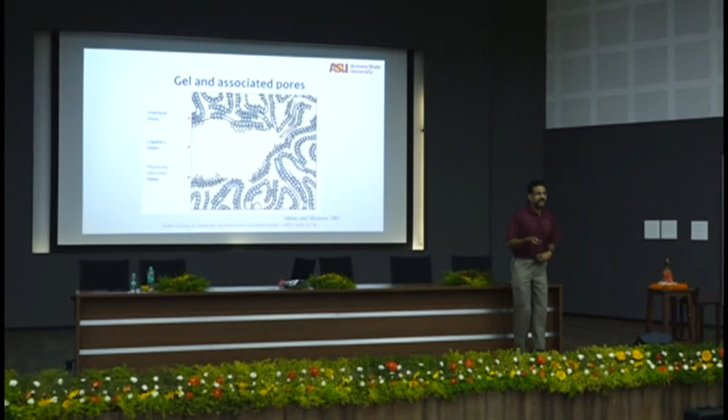Therefore, you will see silica fume. Have you heard of shrinkage in silica fume? Everybody will say that except the silica fume guys, right? Of course, they'll say yes, it shrinks but it won't crack. They're very smart. It shrinks, which is kind of true, because I've given you with silica fume a higher strength for your material. Therefore, even if you have shrinkage, it won't crack.

And it's very hard to refute the fact that a high surface area material like silica fume does shrink. When you have a large surface area, you have large area for water to evaporate. Therefore, it should shrink. It will shrink. But if it shrinks, they'll say, oh, it doesn't crack much because our strength is better. Might be true sometimes. And again, you can't make generalized statements.

That's why when some of you ask me, what will happen, sir? I said, I don't know. You can't make generalized statements. Classic example again: father behavior, I know. Mother behavior, I know. Can I predict the son's behavior? Same thing. I know one concrete in one place, another concrete in another place, same concrete some other place. I have absolutely no way to predict. There are so many variables that go along.

So try to understand and then try to come up with your own rational arguments.

And then there is physically adsorbed water, which will go when the relative humidity goes further down. Gel water, we really don't want to speak of gel water leaving, because CSH, that gel water is the H in CSH. If that H goes, it will become CS. You don't want to talk about a calcium silicate scenario. You want the calcium silicate hydrate. If it's calcium silicate, it's just a mushy powder, it will just go away. You want that hydrate H to be there.

So some people will talk about removing gel water. I'm not a big fan of talking about removing gel water, because if you remove gel water, you don't even have the thing in the primary place. So yeah, you can remove capillary water, you can remove adsorbed water, you can rearrange gel water. Gel water changes, like I said, because this capillary water is gone, you have internal rearrangement. So gel water rearrangement happens, gel water doesn't go away, should not go away.

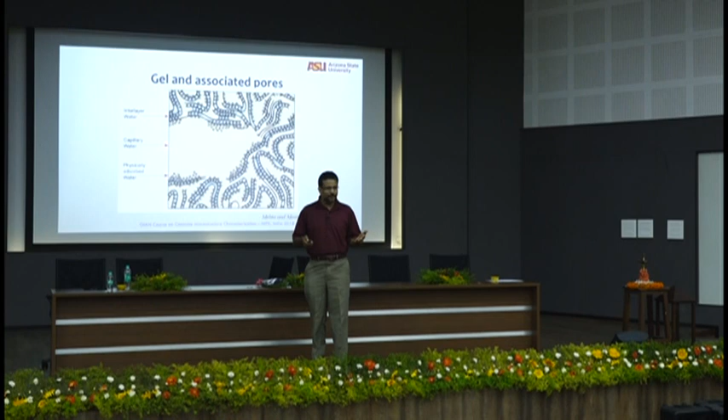And even concrete textbooks, you will see gel pores are dry, drying of gel pores. I mean, gel pores should not be dried. Interlayer water has to be there. If your argument is that gel pore - I'm just calling it a gel pore because I'm calling the smallest pore gel pore, I'm okay with it - but if you're calling gel pore as the interlayer water, that's not correct. Get it?

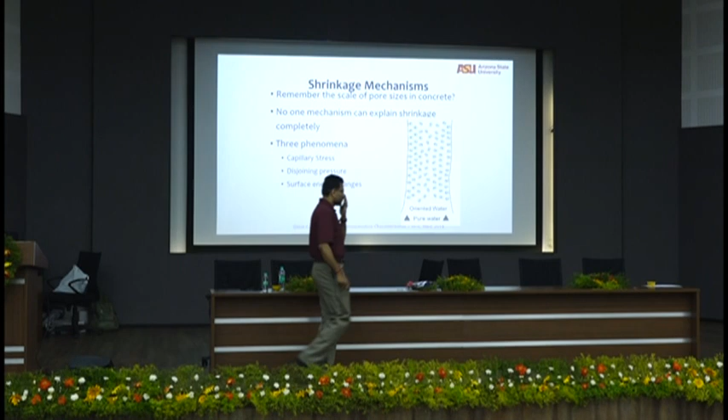If you look at the scale of pore sizes, remember that scale. If the gel pore is my size, the capillary pore is the size of Mars. So you have all these size scales it has to transcend. Therefore it's natural that not one mechanism can explain everything. A lot of people have tried a unified mechanism of shrinkage. Nonsense, you can't explain it - it's like string theory for the universe. There is no one mechanism that explains everything.

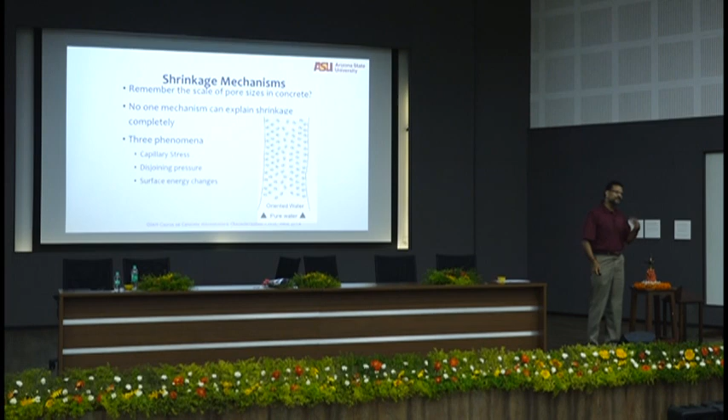So we do it typically by 3 phenomena, and the reason I do only these 3 is they are very easy for you to remember what happens, and therefore when you see shrinkage cracking, you can relate to it quickly. The first is the capillary stress mechanism. Second is disjoining pressure. Third is surface energy changes. I'll explain each very simply.

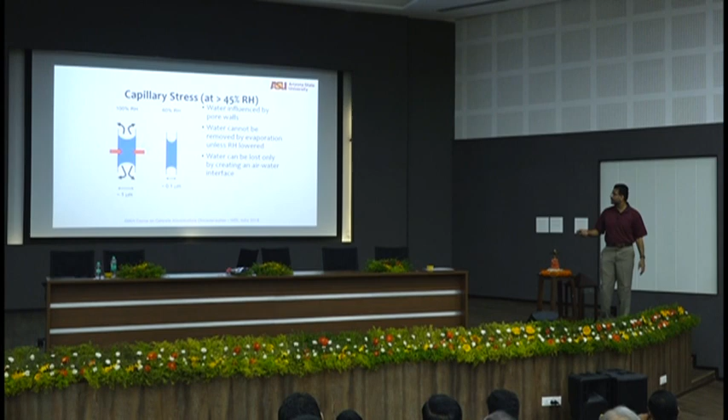Capillary stress mechanism happens only at higher RH. Which means, remember, water from capillary pores will go away. Remember stage 2 ends at about 45% RH in that picture? Capillary water will go only until about 45% RH, so you really don't worry about anything else until then. Capillary stress - water is influenced by pore walls.

Very simple - you see this meniscus? When water goes away, the pore walls try to shrink. This is a larger pore, this is a smaller pore. Larger pore at 100% RH dries off first. If the RH starts to go down, smaller and smaller pores dry off. So water can be lost only by creating an air-water interface.

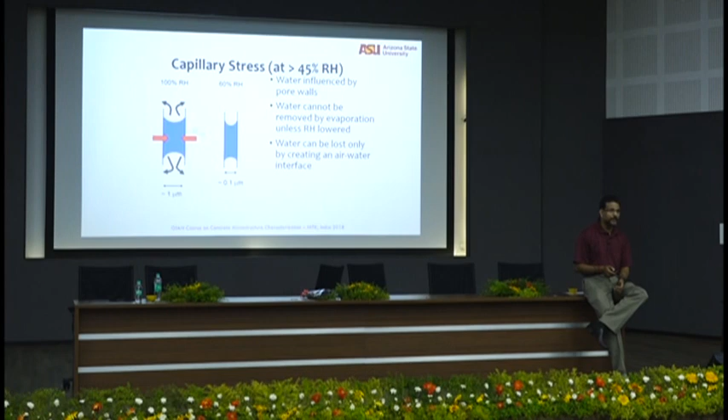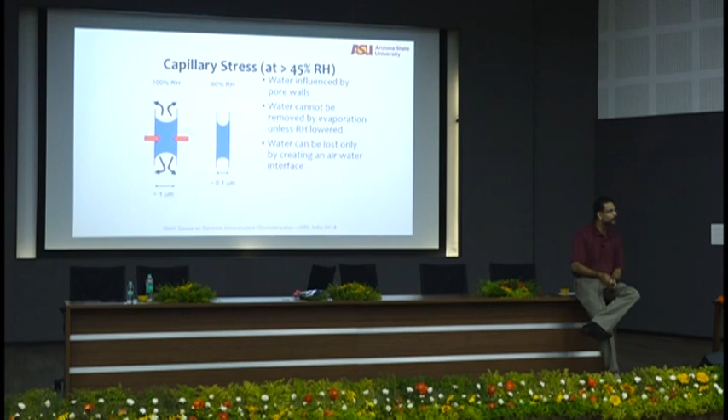Water cannot be removed by evaporation unless RH is lowered. I gave you the example of clothes drying - water cannot be evaporated unless RH is lowered, which means when it's raining very heavily, relative humidity is very high, you cannot put a cloth right next to the rain and heat it up - it's not going to dry. What you need is not heat, what you need is removal of RH. If the heat removes RH, fair enough. So whatever mechanism drops the RH is what you want.

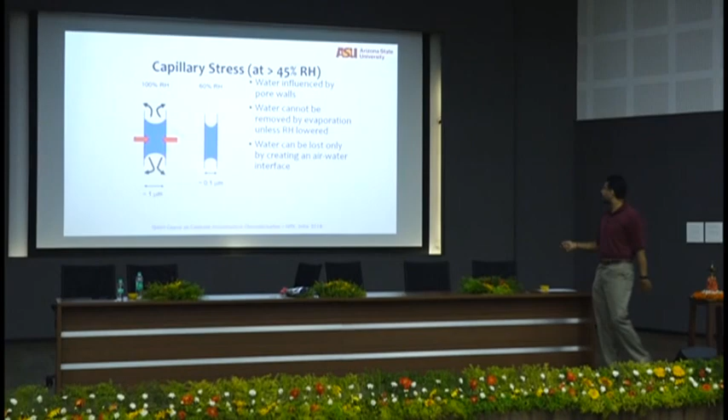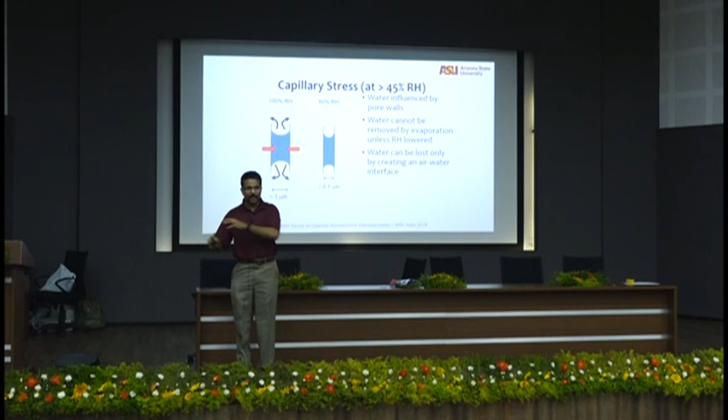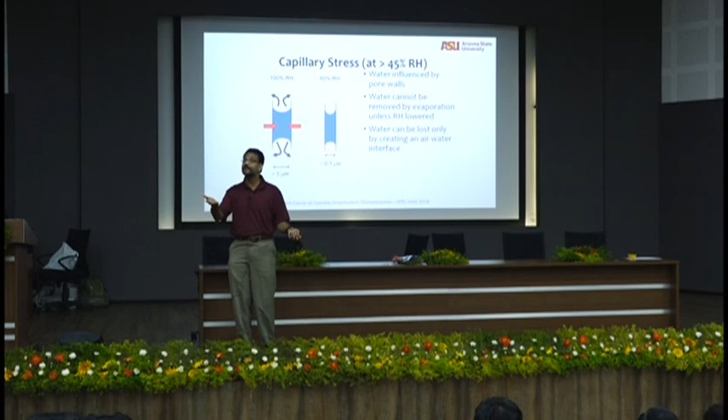Very similar idea here - water can be lost only by creating an air-water interface. So if you talk about drying of anything, the first principle in drying is creating an interface between air and water. Water everywhere, 100% RH - you take one water molecule away, create a water-air interface for that air to drop the RH of the whole system, then you take another water molecule away. Heat does that typically - gradually takes water molecules away, gradually evaporates them, creating space for air, first as water vapor and then as air molecules.

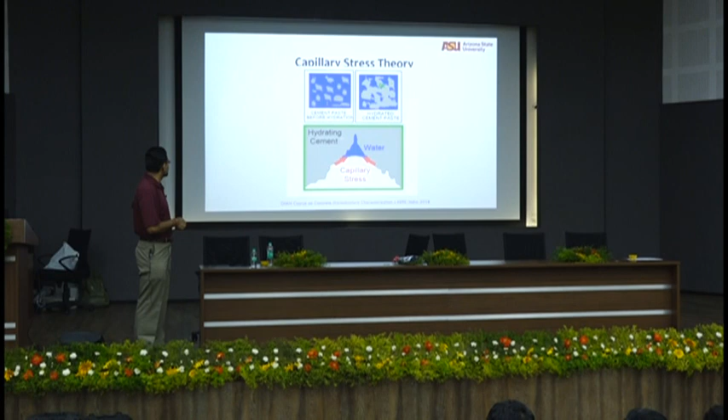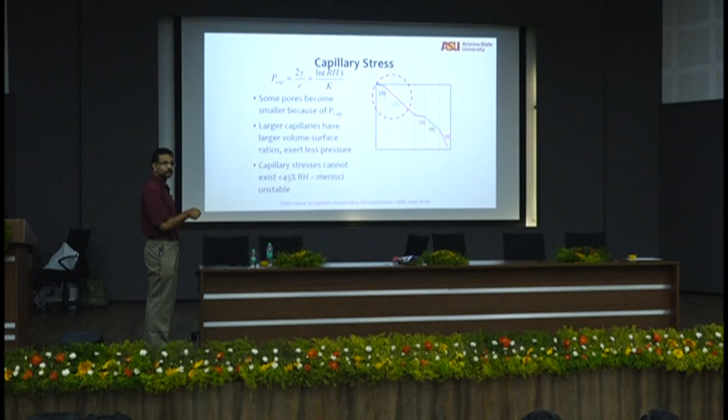That's the capillary stress theory. Basically you have hydrating cement, water in the pores, capillary stress, you dry the water off, and then the simple equation: capillary pressure or capillary stress is 2 times surface tension over the radius. Pressure is inversely proportional to the radius. It can also be given as the natural logarithm of the relative humidity divided by a constant K. I've told you where this happens in that curve - in stage 1 and 2. Capillary stress happens very early on.

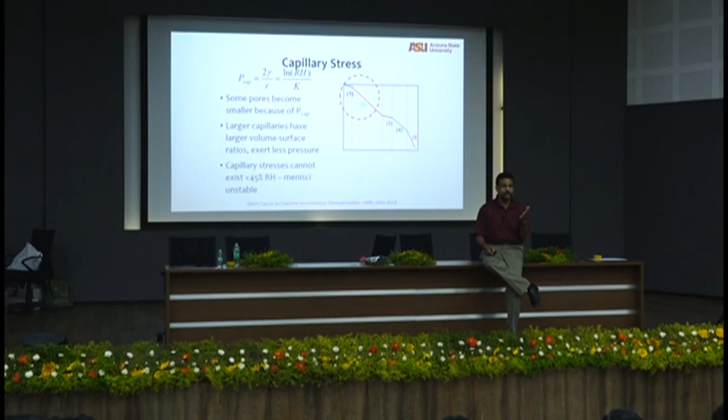This shrinkage is popular in most parts of India where there is reasonable rain. Forget Rajasthan, forget very dry areas, because you will never drop really lower than 45% RH there, because you have seasonal rains replenishing water in your concrete all the time. So this capillary stress mechanism is what happens if you have drying shrinkage.

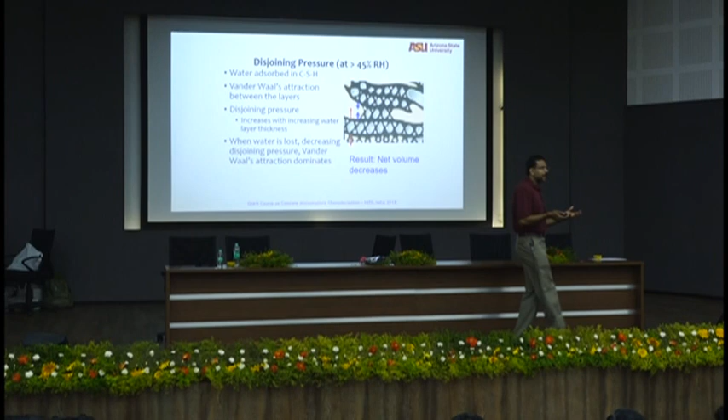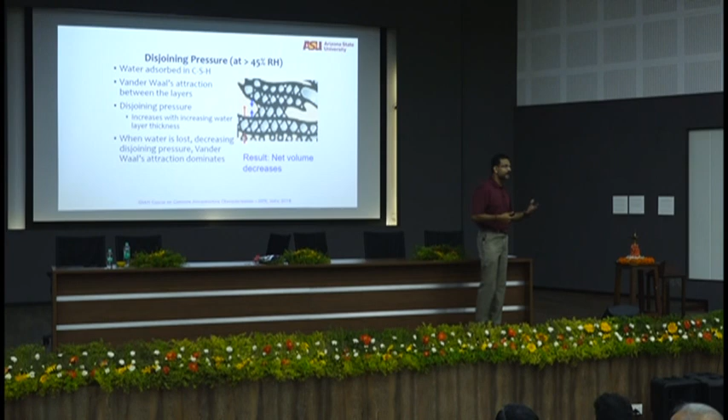The next one, disjoining pressure, also happens at greater than 45% RH, but disjoining pressure is a readjustment. I told you that because of capillaries, water going out of capillaries causes some local readjustment. Water goes out of capillaries at what RH? Greater than 45. But when that happens, at that same RH, there is some internal readjustment. That readjustment is the disjoining pressure, because the adsorbed water, due to van der Waals attraction between the layers, you start to lose the adsorbed water, resulting in a net volume decrease. So van der Waals attraction dominates between those two layers because the adsorbed water is gone, readjusting because the environment around that gel is now drier.

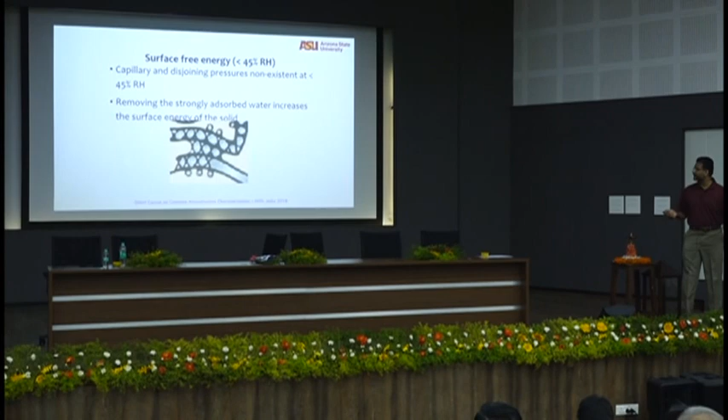So that's disjoining pressure - again everything happening in the microstructure. Surface energy happens at less than 45% RH. This is the only mechanism that happens below 45% RH. It's a very difficult mechanism to explain theoretically, but I'll cover the practical aspects here.

Capillary and disjoining pressure at lower RH is not even existent, because capillary pores have no water. Disjoining pressures are also not there because the equilibrium has been attained.

Then you have to remove the strongly adsorbed water. Now, if I have a layer of something and I attach something on that layer very strongly, the surface energy of that layer is very high.

Think about a piece of cloth and I'm attaching small beads in that cloth. To remove that, because of the surface area, removing the bead is going to be very hard if there is a kind of natural attraction between the cloth and the bead. It's going to be very hard to remove that.

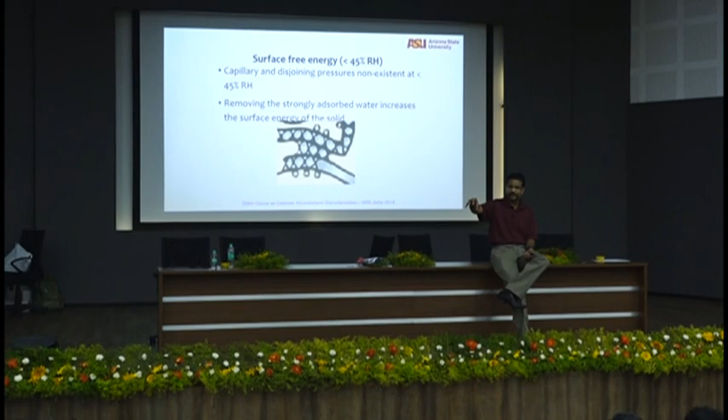So removing the strongly adsorbed water increases the surface energy of the solid. When I remove a layer of water, you remember BET theory, nitrogen forming layers on the surface, right? So when you start to remove that, you have to overcome the surface energy of the solid. So you will have a lot of pressure created.

And that happens at low RH, and that is what happens. You really don't, unless it's very, very dry. So where I am in Phoenix, we have a lot of surface energy effects, but most places with reasonable amount of moisture saturation, capillary and disjoining pressure is enough to talk about shrinkage.

Now, the consequence is that you will have cracking, very fine microcracks. You will have extremely fine microcracks because this is happening at real small pores. So the concrete will be extremely microcracked because of heat. It won't be visible, no, these are at a very small level.

But it has a tendency, it will have the capacity under load, under constant fatigue, all these cracks will grow. Shrinkage cracks by themselves are not dangerous, unless it's a very large shrinkage crack that happened on the surface. Not very dangerous. None of the shrinkage cracks are consequential in terms of load carrying capacity. There has never been a case where just because of shrinkage the concrete failed.

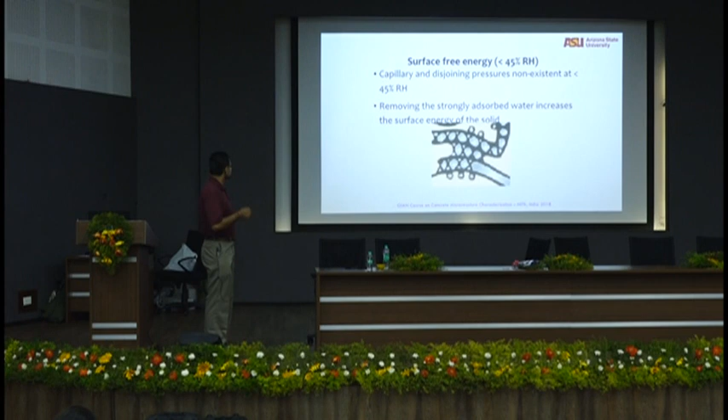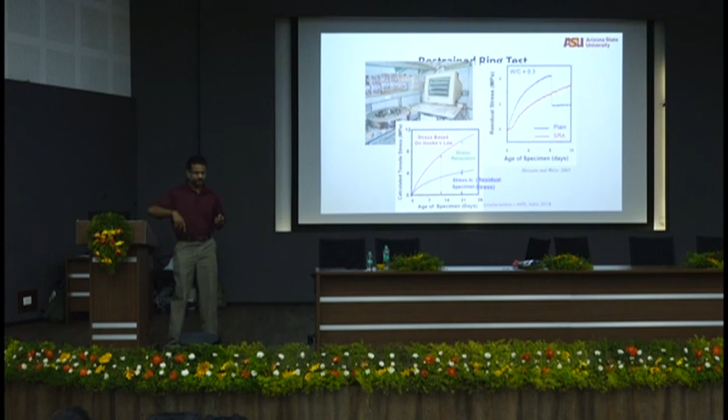So the simplistic idea is you have a calculated tensile stress, specimen stress, stress based on Hooke's law, stress relaxation. All these, if you're doing a restraint ring test, ASTM standard tells you how to do all of those.

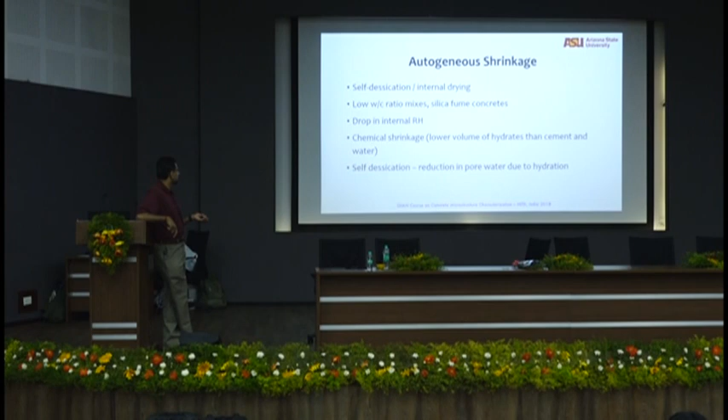Autogenous shrinkage, self-desiccation, internal drying, low water cement ratio, we talked about that, drop in internal RH. Chemical shrinkage, lower volume of hydrates than cement and water. Self-desiccation is reduction of pore water due to hydration.

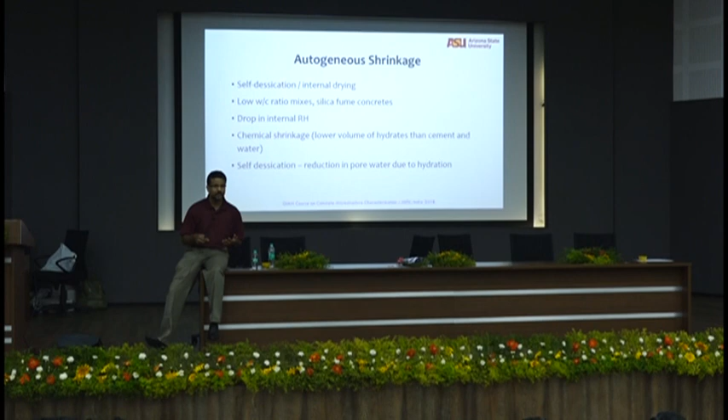So all of these, sometimes I feel this is overkilling using words. There are so many words: self-desiccation, autogenous shrinkage, chemical shrinkage, internal drying. A lot of times you use all of these different words and people get confused. It's broadly similar to what you guys heard yesterday when he was talking about different journals and stuff, right? H index, I index, SCI expanded.

At the end of the day, none of this matters. You have to do your work, you have to publish in a good journal. But sometimes you do overkill with these words, and that is one of the downsides of research. I should say the downside also. I said a lot of positives, right? Because a lot of us, I want to be general, I don't want to include anybody in specific, a lot of us do research for the sake of doing research.

I want a PhD, therefore I do. What's the use of it? Why do I care? I get my degree, right? So when you do that, that's a result. I want to develop something new. That complicated everybody else. The world was a wonderful place without you.

Suddenly you came in, published a paper, and people started paying attention to this. Some people really start with low water cement ratio.

Autogenous shrinkage, chemical shrinkage - every concrete, every reaction, every damn thing that you react one with the other has a chemical shrinkage. Does it influence things? Depends. Be careful with these terms, don't use them for the sake of using them if you don't need it. For example, if you're doing volume changes in concrete from the perspective of cracking in a concrete bridge deck or pavement, forget autogenous shrinkage, forget chemical shrinkage. You'll be better off with drying shrinkage by itself.

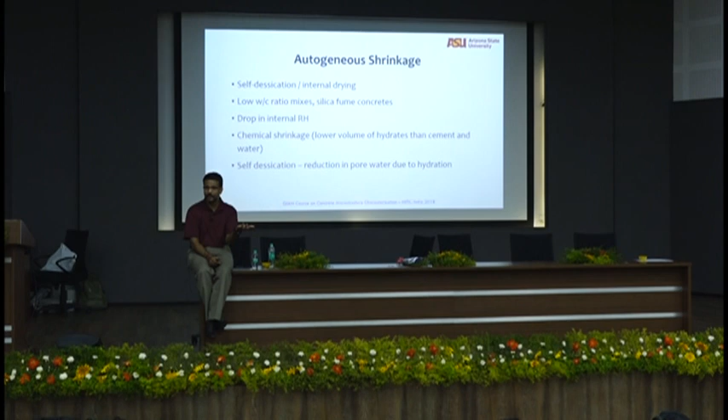We still struggle to understand the real mechanisms and ramifications of shrinkage and creep. Eventually we know it results in cracking, because if volume changes and it doesn't crack, nobody has a problem. It's only because cracking happens that we are concerned about it.

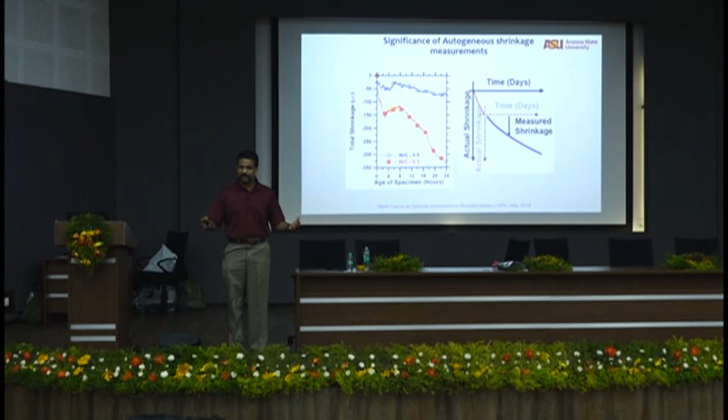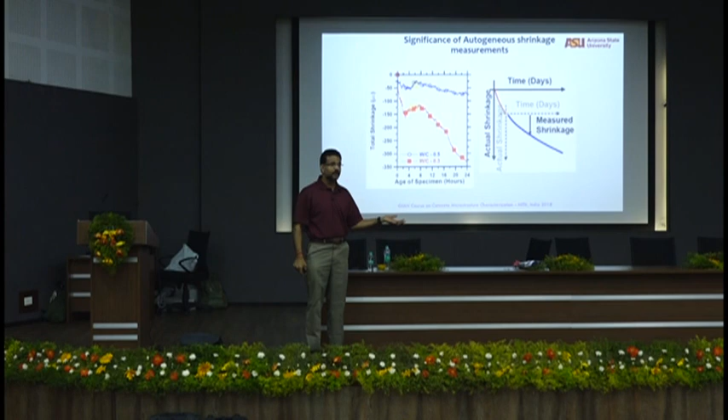Here is how you do autogenous shrinkage. The other advantage with your ring test is the residual stress that you measure includes autogenous, chemical, everything, because you start measuring as soon as you pour your concrete. But if you're doing restrained shrinkage or free shrinkage bar testing, when do you start measuring it? After 24 hours, which means you completely lose that part of the shrinkage, and you're basing everything on that measured shrinkage, and people put in these random numbers.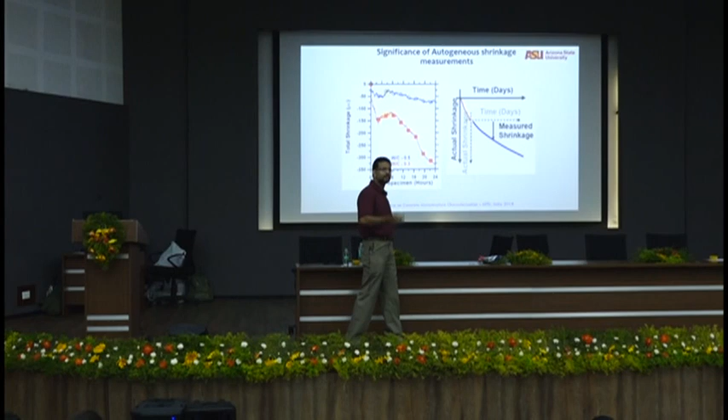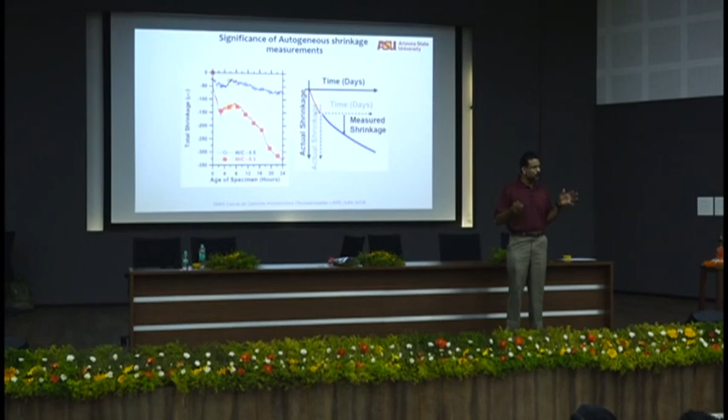600 microstrains and the concrete will crack - have you heard of that? You see it written in specifications: 600 microstrains and the concrete will crack. How do you know? 600 microstrains under what condition? Sometimes we overkill - somebody states a number from a study in the US or Europe, and immediately you put it in the specifications. That 600 microstrains is highly dependent on the relative humidity. You don't have the same weather conditions as in another place, so a lot of those things will change.

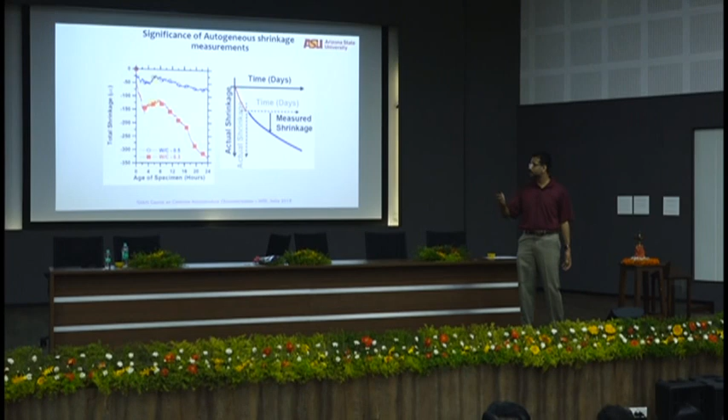Shrinkage reducing admixtures can reduce shrinkage. A lot of companies are making shrinkage reducing admixtures, but if you can buy alcohol cheap, that's the best shrinkage reducing agent. Basically, the best shrinkage reducing admixture is vodka. Why? Russians drink purer alcohol - vodka's alcohol content is much higher compared to Scottish and Irish drinks. Of course those are very expensive, you don't need that. So basically it's just alcohol, higher alcohol content.

What it does is a very simple thing. Do you know the surface tension of water? PhD students should know this number. I still remember the old British units: 72 dynes per centimeter. You can convert it to newtons per meter, whichever way you have. That is the surface tension of water.

Remember the capillary pressure equation I showed you earlier - does anybody remember it without looking? P equals 2 gamma over R. What is gamma? Surface tension. So to reduce the pressure, I have two options: increase the radius or decrease the surface tension. Increasing the radius means putting in large pores in concrete - do you want that? No. Small pores in concrete I like, but small pores will give higher stresses when water evaporates. So my option is to reduce the surface tension of water.

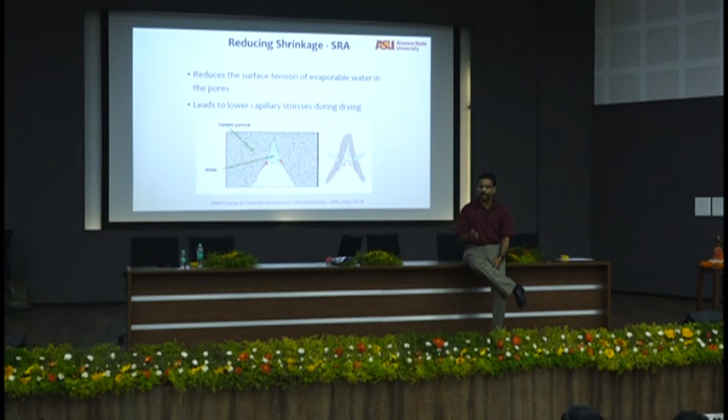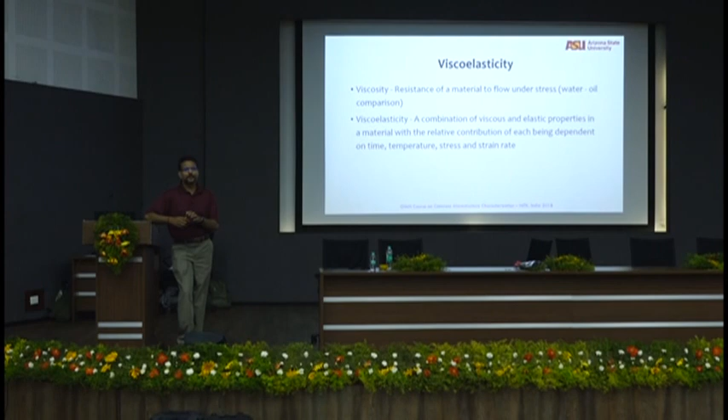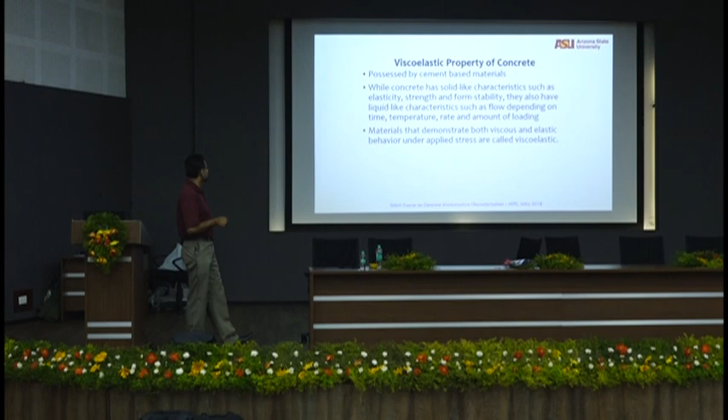Okay, I think we'll have time to finish creep and viscoelasticity also today. Quickly, we talked about viscosity being the resistance to flow under stress. I'm doing only those properties relevant to microstructure. So you have a combination of viscous and elastic properties. All of you know what creep is, right? Creep and relaxation. Concrete has solid-like characteristics like elasticity, strength, stability. They also have liquid-like characteristics like flow. Rheology, we talked about that. So materials that demonstrate both viscous and elastic nature are called viscoelastic.

Creep is the increase in strain under constant stress. Relaxation is drop in stress under constant strain. Okay, so we need both of these.

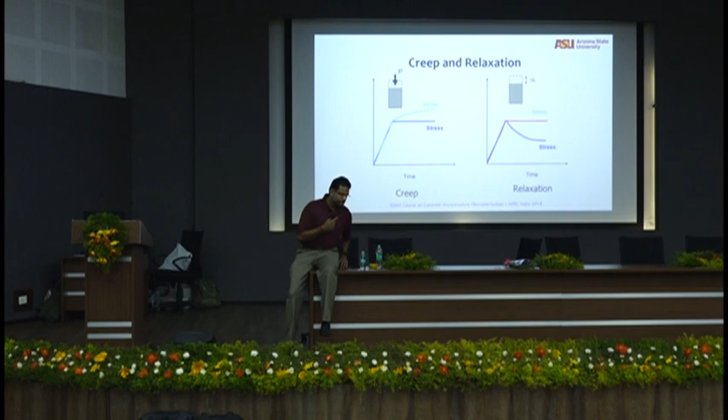So let me ask you a question. If you are building a high-rise building with concrete, columns with concrete, there is a natural tendency to go to high-strength concrete, right? If you're doing a very high-rise structure, very high-strength column. What is the reason they give for very high-strength concrete for a column? You can reduce the member size, right? So high strength, you can reduce the member size. But what happens with a very high-strength concrete with respect to elastic modulus?

Elastic modulus is a function of square root of the strength, right? So what happens when the strength goes up? Elastic modulus goes up. What happens when the elastic modulus goes up? Think simple linear elasticity: stress is elastic modulus times strain. For the same strain, what happens when elastic modulus goes up? Stress goes up. What happens when stress goes up? You are likely to have microcracking. What is the only thing that can save you from this higher stress?

Relaxation, right? What do you want for relaxation? A lower elastic modulus, right? Very stiff materials don't relax. You want a lower elastic modulus for relaxed stresses. Now look at the paradox. Immediate gain: reducing cross-sectional area gives more plinth area to the builder and developer so he can sell more square feet of space. High strength is a very fancy term that everybody loves. Great high strength concrete, wonderful. But look at the chances of cracking in those concretes.